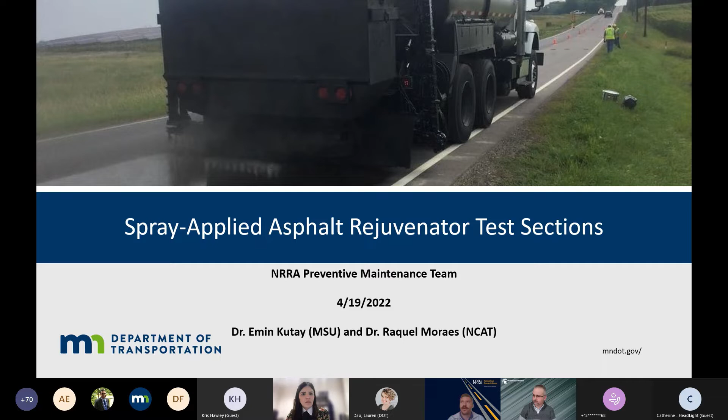This project, the idea really started picking up steam in late 2019. The NRRA Flexible team did a similar project with mixed rejuvenators, where we took a common roadway and were able to insert different products into an existing MnDOT project and then monitor the performance of those projects over time. So back in 2019, we really started moving on this idea, and we had partnered with the city of St. Michael to apply these treatments on a common road, and then MnDOT and MnRoad would monitor those.

As we all remember, things planned for 2020 got delayed, postponed. COVID hit in 2020, we delayed until 2021. During that time, the Minnesota Local Road Research Board found out about this NRRA project and said, hey, we're interested. And they actually funded an additional research effort, which is why we have two presenters and two researchers today.

Once there was the additional research effort, we realized that there was a lot of attention and a lot of demands placed on these sections in St. Michael, and we weren't going to be able to take the amount of cores that we needed to do the characterization over time that we wanted to do. So we added sections at MnRoad.

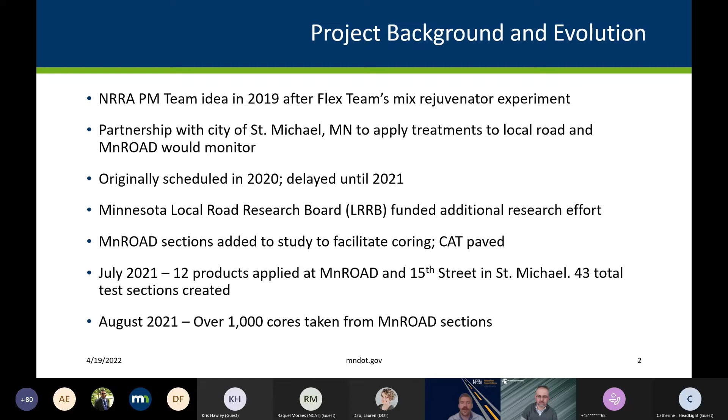So the LRRB portion of the study—the LRRB is the Minnesota Local Road Research Board, which is a unique entity here in Minnesota made up of cities and counties, focusing on all types of road research. Pavements are just a small piece of that, but a very critical piece of their research efforts, and a very big supporter of MnRoad and our low volume road.

So the Local Road Research Board funded the Michigan State portion of the project, which is Dr. Emin Kutay, and they're really focused on the field performance—the immediate impact related to friction and reflectivity—and then creating implementation type tools geared towards city and county engineers who are tasked with managing pavements as well as all their other responsibilities.

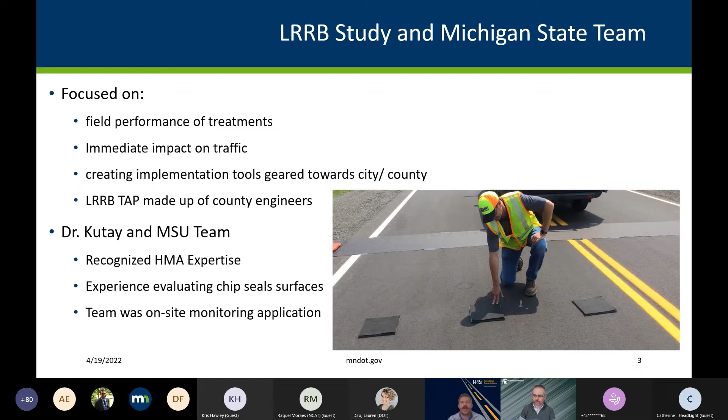So really what to expect when you apply these products, and then how long are they going to last. Dr. Kutay has recognized HMA experience from his time at Federal Highway Turner Fairbanks, but particularly relevant to this project is his experience evaluating chip seals and chip seal surfaces, and they were here on site during the product applications.

So then the NRRA study and the NCAT team is really focused on the binder properties and the changes from the treatment. So once we spray this treatment, what does it change in the surface binder? And then really how long do those changes last?

The TAP with the NRRA is made up of NRRA agency members as well as product representatives, which really gives us that integral feedback loop of how we can tailor the research to best present the results and make the results usable for all stakeholders in the project.

Raquel, or Dr. Moraes at NCAT, is a recognized expert in asphalt binder chemistry. I really respect Raquel. I think she's one of the few actual trained chemists in our field and not a trained pavement engineer that is trying to dust off their chemistry. So really excited to have both of these highly qualified researchers on the project.

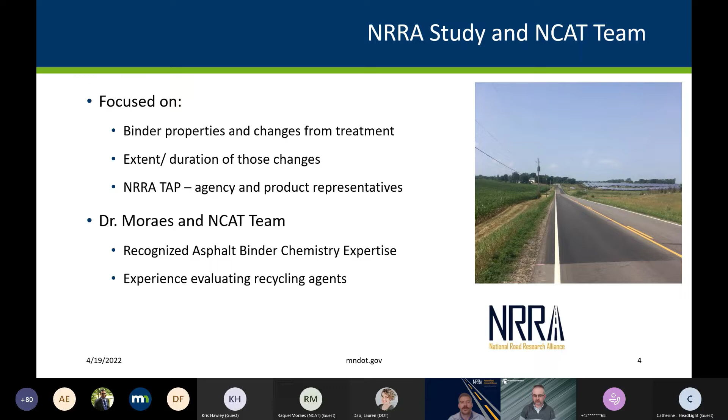I don't think any of these entities, even MnRoad, could have pulled off this type of experiment, or this large of an experiment, without the overall collaboration and environment of the NRRA.

Specifically, I got to mention the product manufacturers and the representatives for those. So we had products in this study from 7 different manufacturers, 12 products total. But having all of these competitors on a common study, we haven't had any of the issues or any of the stuff that you would worry about bringing competitors into a common project and room. We're all really working towards making the research as beneficial as possible for everybody.

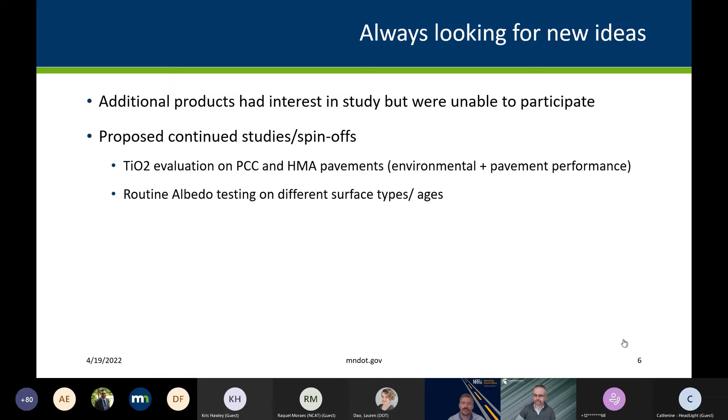Okay. I'm going to go ahead and get started. Can you see my screen and can you hear me? Michael, can you confirm? Yes, we can. Well, thank you so much, Michael, for the nice introduction.

Before I start with the slides, I'd like to acknowledge my co-PIs on this project, Dr. Haider and Dr. Chatti from Michigan State University. Also, our graduate student, Purnachandra Vadi, who's the person who's been doing most of the work in here.

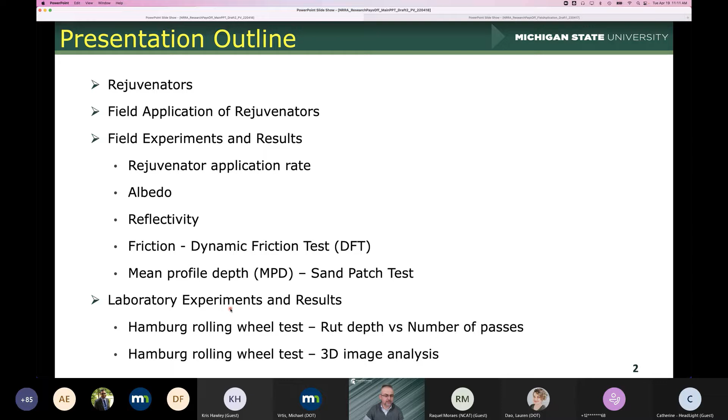So this is a quick outline of my presentation today. I'll be providing some information about the rejuvenators that were applied at MnROAD sections and provide some very quick videos of applications, so that you can have an idea of how they look. I'll present some of the results of the field experiments, application rate measurements, albedo, reflectivity, friction, as well as mean profile depth. And also we started running some experiments on the 1,000 cores that Michael mentioned. We don't have all 1,000 of them, but we have about half. And we have started testing those, and we'll show you some of the results of our testing.

So in terms of introduction, spray-on rejuvenators are used to revert asphalt binder aging. So I'm assuming since you are here, you know about what they are. There are many petroleum-based as well as bio-based products, and they are supposed to prolong the service life of pavements, seal minor cracks at the surface layers, reduce the permeability, and so they have a lot of advantages, and each of these products have different advantages.

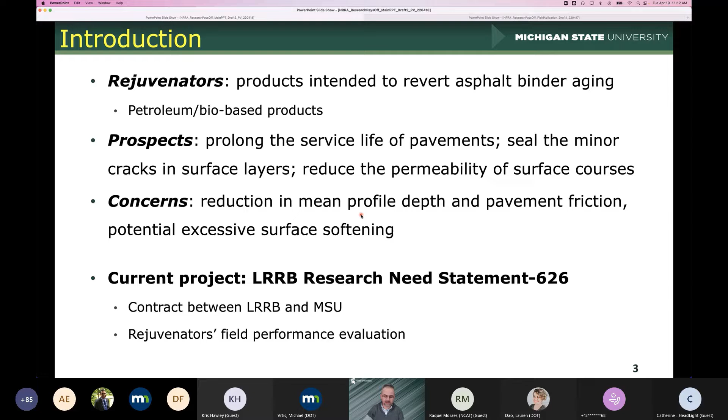There might be some concerns on mean profile depth and friction at the surface, and potential for excessive softening at the surface if the material is causing too much softening. So these could be some issues. So this project is going to be looking into all these and try to find some answers to some of the questions.

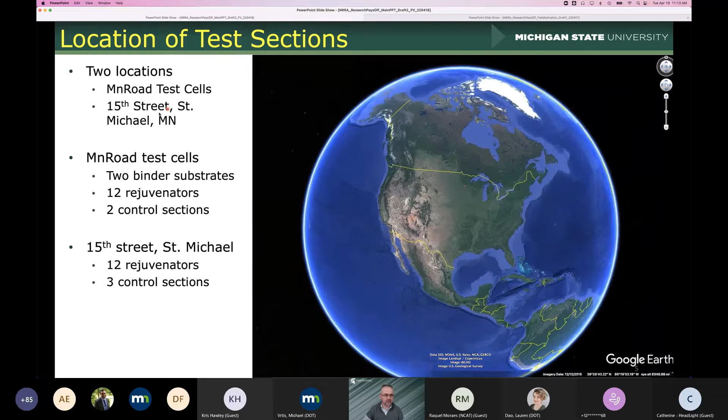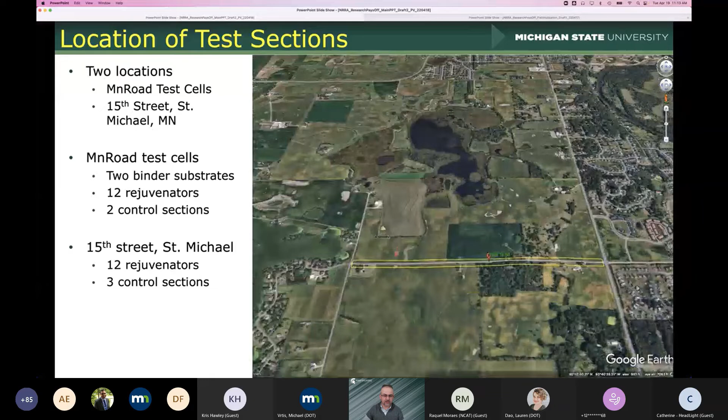They were all applied on 2 weeks back to back in July, except one of them. One of them, ARA1 Ti, was applied about 3 weeks later because of some scheduling issues. So we have 2 locations. One location is the MnROAD test sections at low volume. The other one is at 15th Street, St. Michael. This is the city of St. Michael, and this is where the real-life field test sections are located. The ones in the low volume road section are actually located right here. The ones at 15th Street are not too far from MnROAD, and this is the location.

So if you look at the 15th Street sections as well as the MnROAD test section, this shows the locations of the cells as well as their names. In here we had 3 controls: 1514, 1505, and 1507 are the 3 control sections that were not sprayed with anything, and the remaining locations are all sprayed with different rejuvenators, and I'll show you some videos of those in a minute.

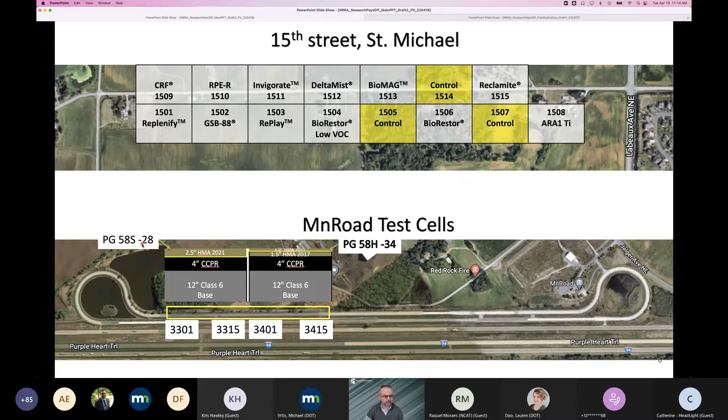At the low volume section and MnROAD, as Michael mentioned, there are 2 substrates. One is an overlay with 58S28 binder, and the other one is a 58H34 binder. The test sections with the -34 are 3401 through 3415. There's a control as well there, and 3301 to 3315 are the cell numbers for the applications at the surface of 58-28 binder.

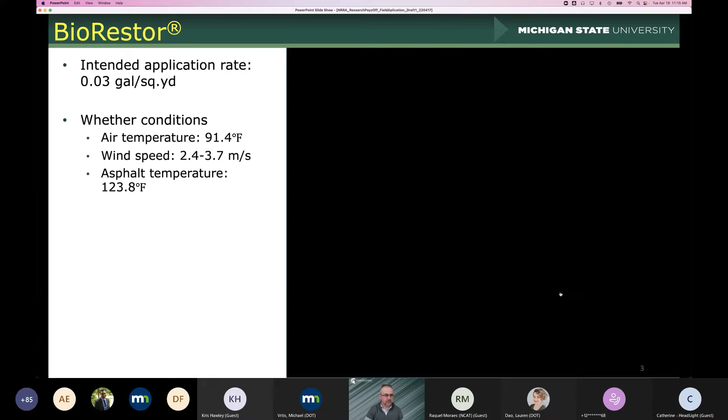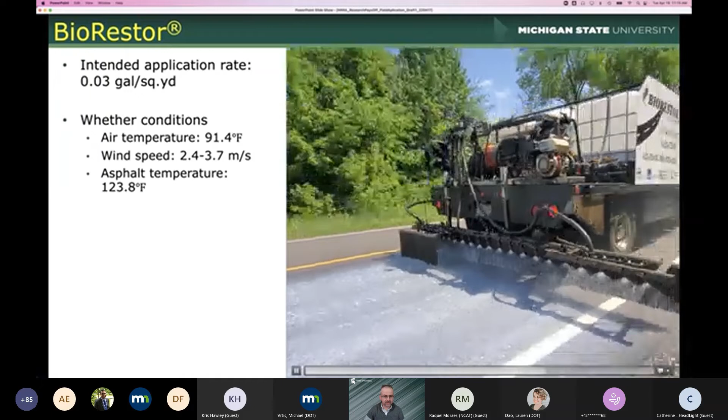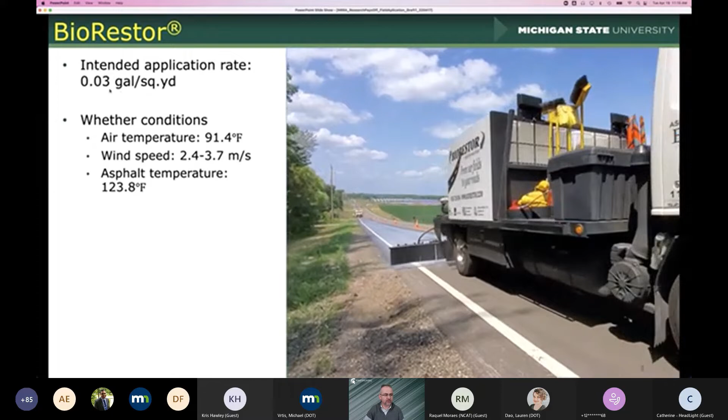So now I'm going to switch to another slide to show you some videos of the applications. So this is one of the applications. As you can see, most of the applications were done on a sunny summer day, essentially. The temperatures were about 91 Fahrenheit. This particular one had a low application rate of about, this is the intended application rate, by the way, 0.03 gallons per square yard. This is what we were given by the manufacturer. This had some kind of milky color, and we had some wind during the construction, but not much.

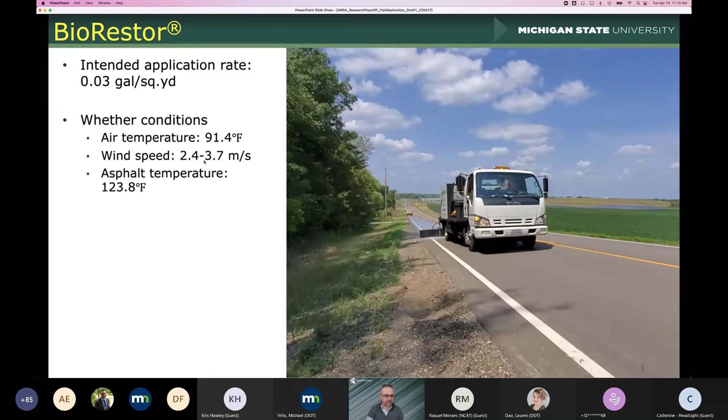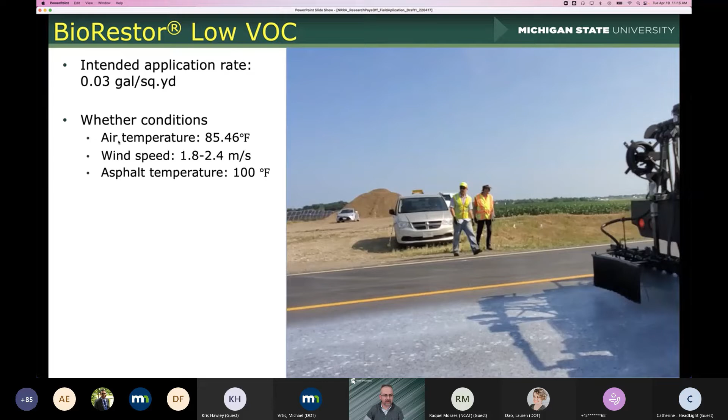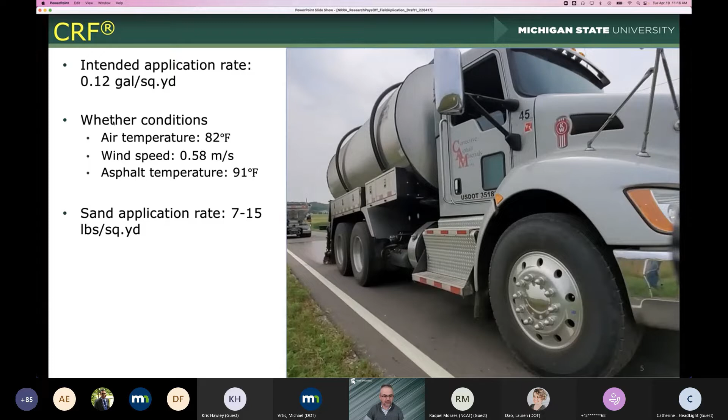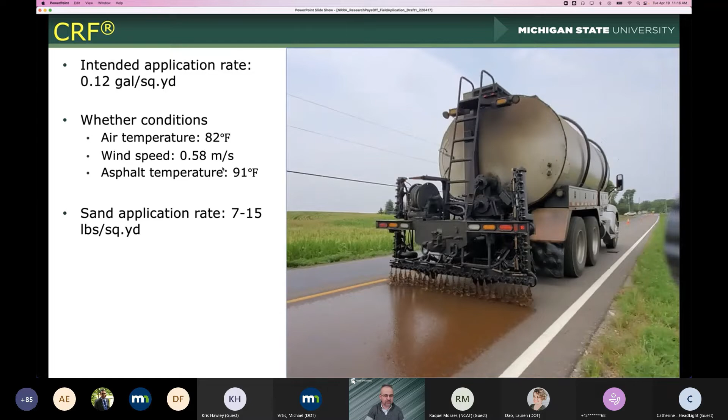I'll go quickly here. This is the second product. Application rate is also relatively low compared to some others. So I'll go through the next one. This one is the CRF. This particular one had the application rate much higher than the other ones. The air temperature, surface temperature and wind speeds were all comparable between different applications. At the end of this CRF application, sand was applied on the surface. So that was one of the practices of this particular application.

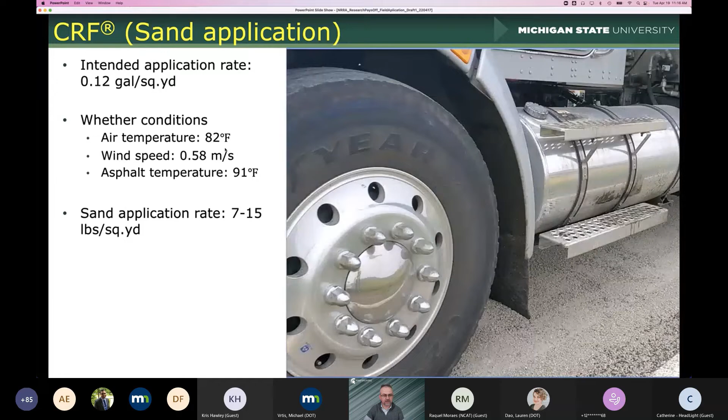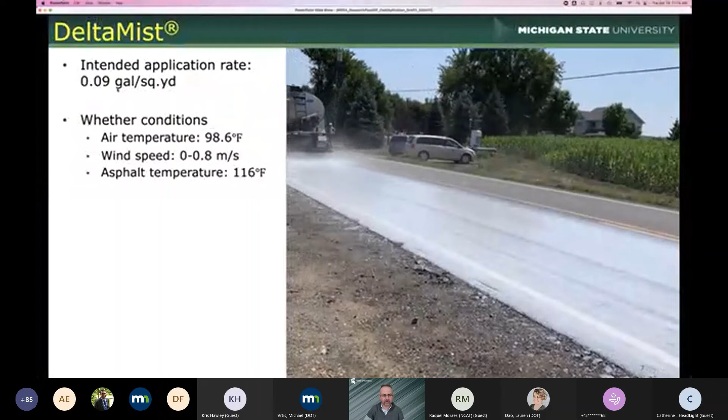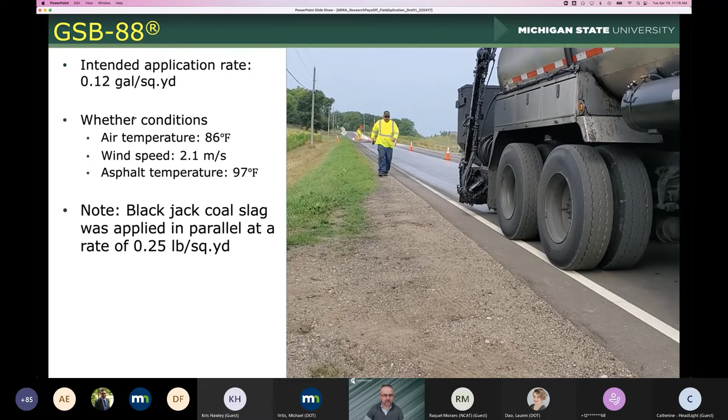This is another product, Delta Mist, which is 0.09 gallons per square yard, and the air temperature was a little bit higher, pavement temperature a little bit higher on this particular day. So I'm going to go really quick to show you all. So this was GSB-88, a little high on the application rate side, and while the material was applied, at the back, black coal slag was applied to provide friction.

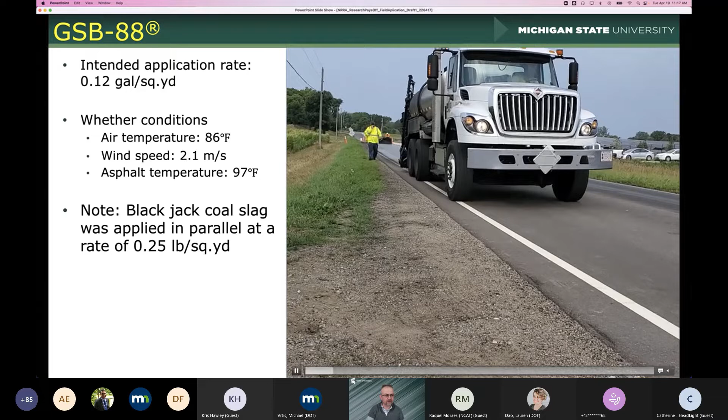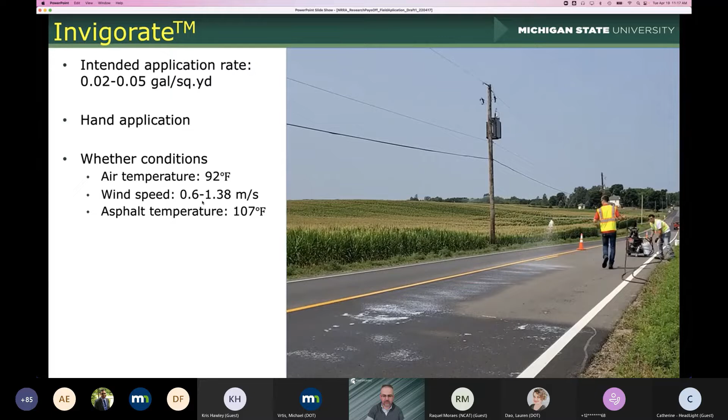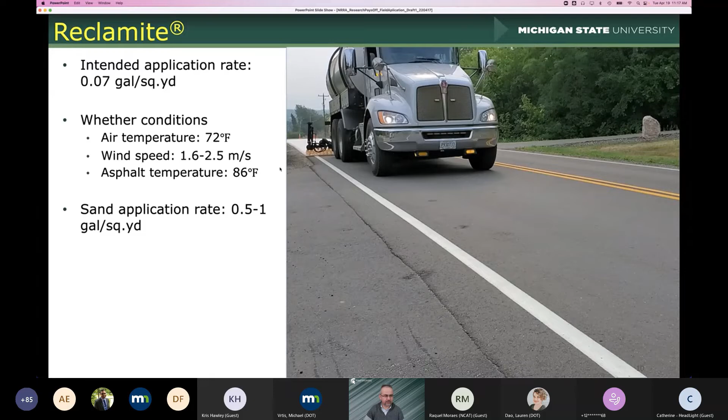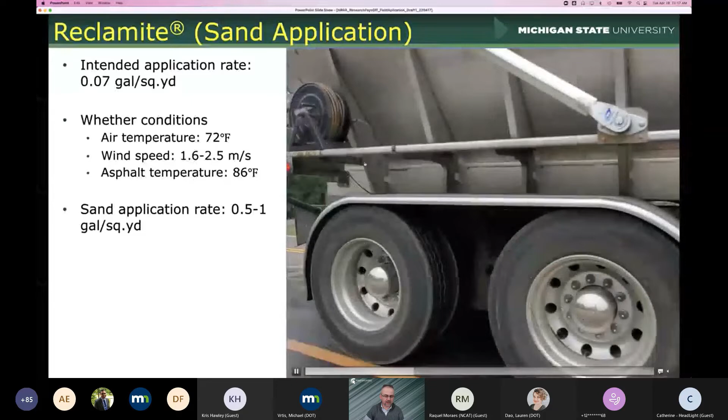So Invigorate, this particular one was applied by hand, and its application rate ranged from 0.02 to 0.05, and the weather conditions were essentially the same. So I'm going to go kind of quick here. So Reclamite, this had some brownish color. This had also similar application, except the application rates were a little bit higher. And at the end, there was a sand application as well. So this shows the sand application at the end of the application of the actual material.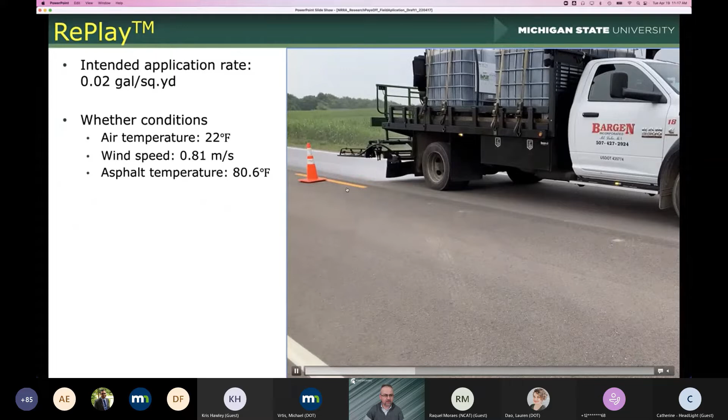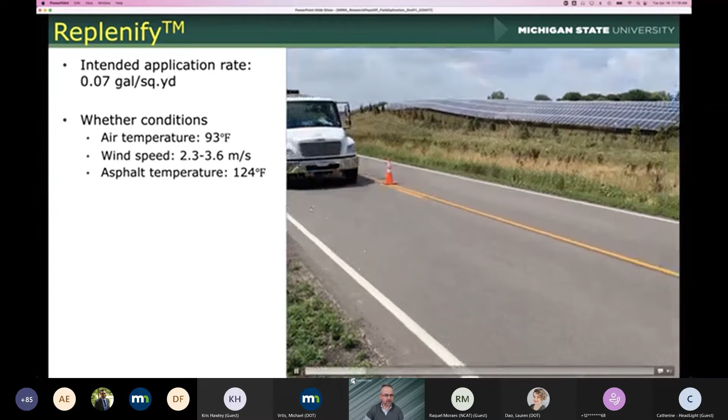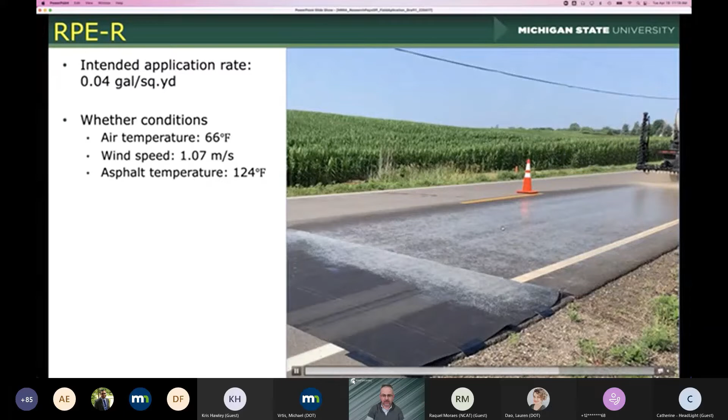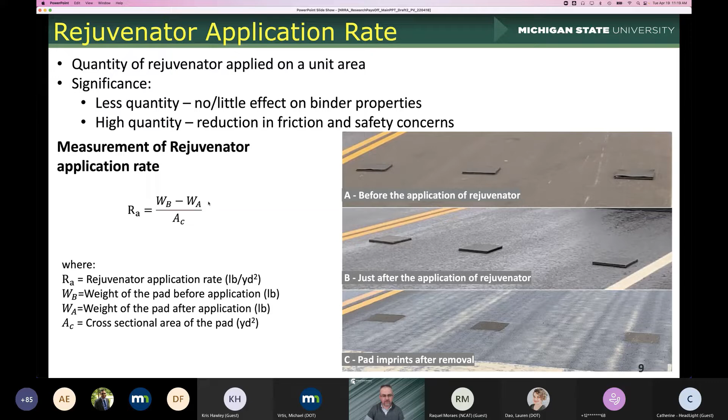So during the application, as you've seen from the videos, we measured the rejuvenator application rate. We meaning actually the team. Michael Vrtis actually measured pretty much all of these. The measurement of the application rate was based on weight, not volume. That's why I will be providing the rates in terms of pounds per square yard. Before the application of the rejuvenator, these pads were placed, and we had the weights before the application and weights after, and the difference divided by the cross-sectional area gave us the application rates.

So this slide is showing the application rates that we measured. The ones on the left show the weight-based application rate at 15th Street and the 2 MnROAD sections. On the right, the application rates that were reported by the manufacturers. This is in gallons per square yard, and this is in pounds per square yard. As you can see, the application rates varied quite a bit depending on the product. Some application rates were quite high, and some were quite low. Typically application rates from one section to another were mostly consistent, except in a few cases where certain application rates were kind of too low. So this needs to be noted in case there are issues in the future.

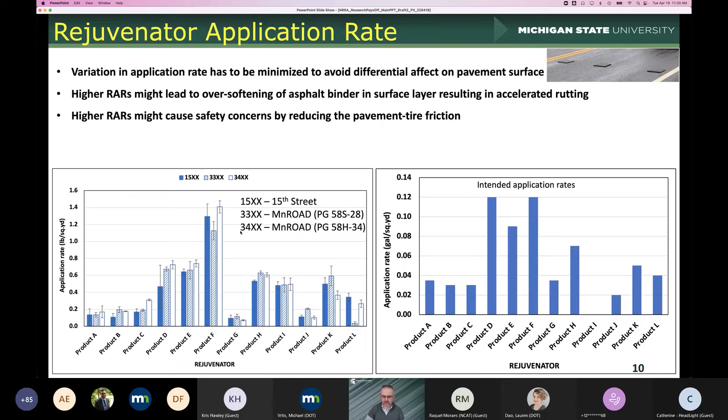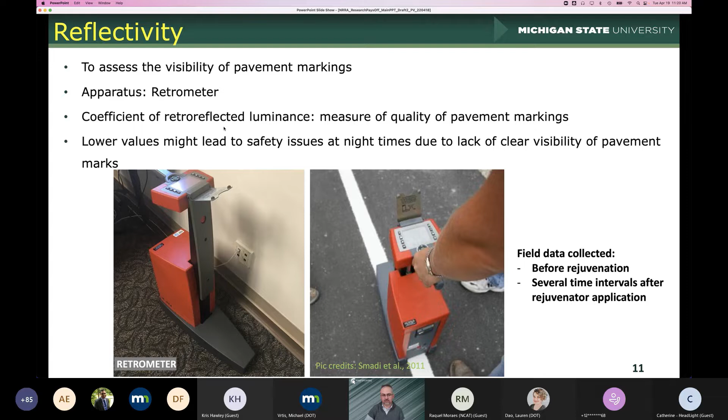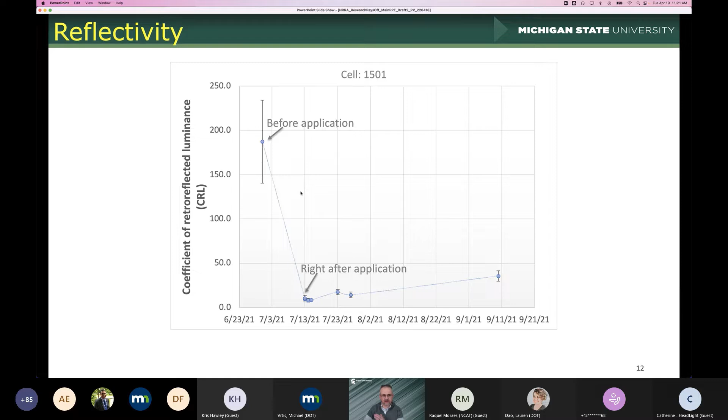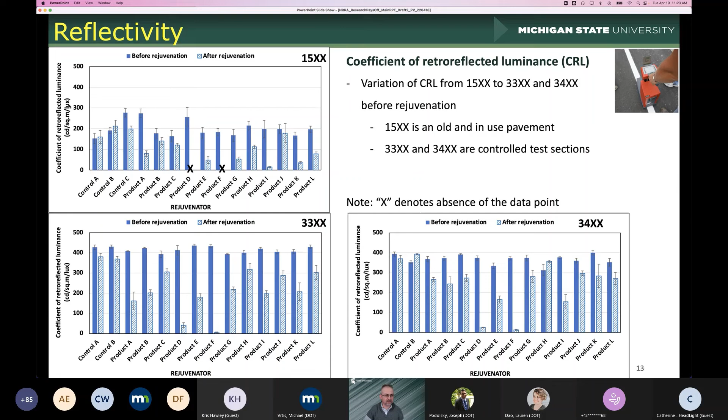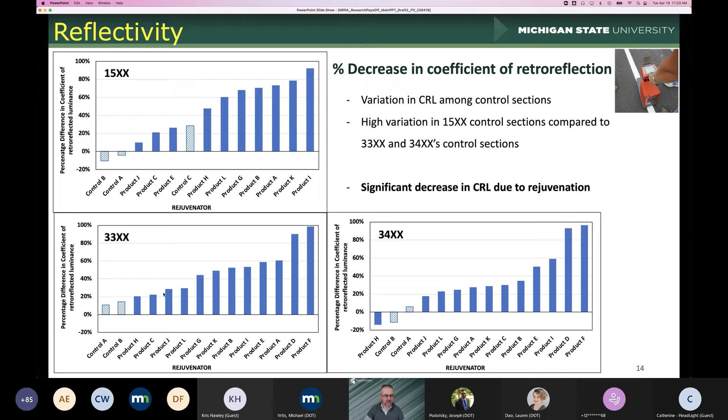This is the same data shown in a different way, just the difference. If you look at the percent difference between before and after, we sorted the data, and I highlighted the controls so you can see where they are. So you can see the difference between the different products. As I mentioned, some products had a significant decrease, as high as almost 95%, some somewhere in between, and some didn't affect the reflectivity much.

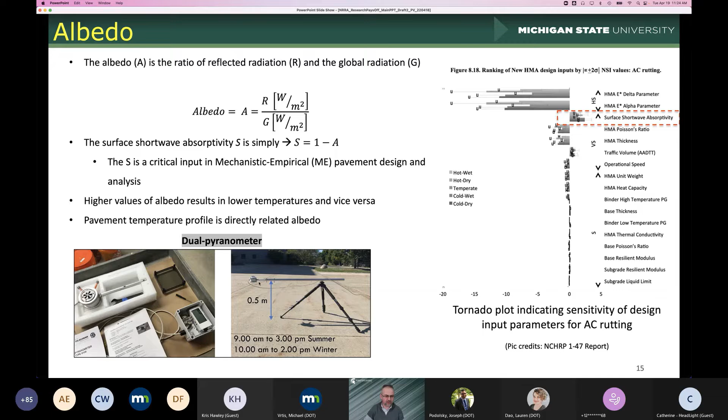We wanted to see if these products affect the absorptivity or albedo. I'm going to use the term albedo as just 1 minus SA. Albedo is essentially reflected radiation divided by the global radiation. We measure it using this dual pyranometer device. These are some of the results of albedo, and as you can see, albedo didn't change too much from one product to another in certain cases.

In certain cases, there was significant change. In certain cases, there were increases, which you wouldn't expect, to be brighter. A higher albedo means brighter color, meaning more reflectance. So in some products we had more reflectance compared to the control, and that's because of the sand. When the sand is applied on top of the product, that affected the albedo.

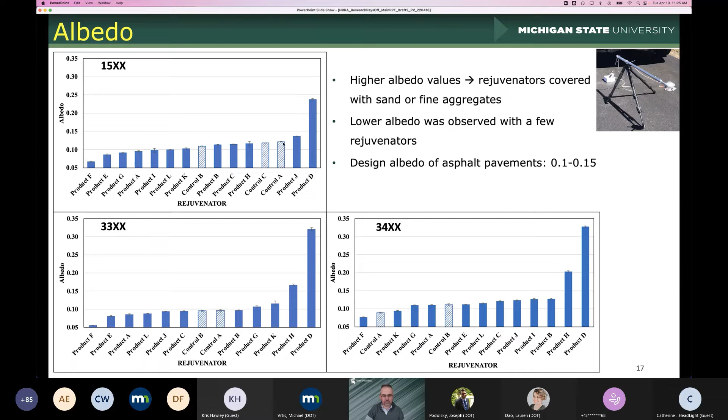One thing I want you to remember is that lower albedo means less reflectance. That means the temperature of the pavement will be higher, so there will be more heat absorbance when you have low albedo values. These products will be absorbing more heat compared to these products. If you were to classify them, a few of them were low values, a few of them high, and the rest are pretty much the same.

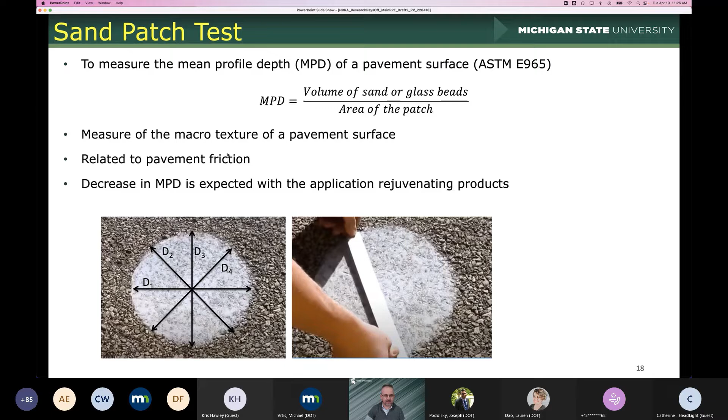The next set of tests I want to show is the sand patch test, essentially mean profile depth using the sand patch. What you're seeing here is all the different sand patch results. The bottom line is that the mean profile depth values for most products were pretty much the same, and very low in magnitude, except in a few. Again, that's because of the application of sand or fine aggregate at the end. You would see some increase in mean profile depth there; other than those, all the rest are small values of mean profile depth.

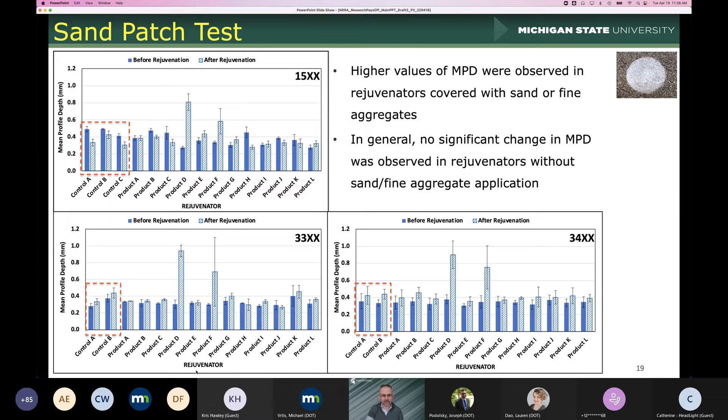So the next set of tests that I want to show is the dynamic friction tester, DFT, results.

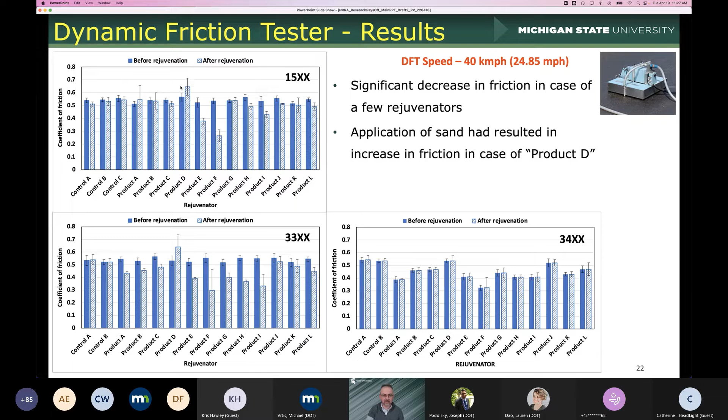Friction tests were measured at different speeds: 20, 40, and 60 kilometers per hour. These three plots show the three different speeds, and I'm going back and forth just to show the friction values before and after application, similar to the sand patch results. Some applications showed not much difference, while some did have an effect, reducing friction, like products E and F in this particular case. In some applications, there was an increase in friction, as I mentioned, because of the applied sand as well.

Lastly, I'd like to present some partial results of the laboratory experiments we have been running. These laboratory experiments included several types of tests on the cores that we have. We've started these tests but haven't finished yet - this is the test we just started essentially. I'm going to provide only the tests we are running on the Hamburg wheel tracking device. We will be running all these experiments, and for the sake of time, I will not go through all of them.

The idea of the Hamburg wheel tracking test, the reason why we are running it, is that if there is excessive softening at the surface because of the application of this rejuvenator, first there will be rutting compared to the control, and also we are expecting heaving at the surface. Another potential thing that can happen, which we kind of saw, is that if there's excessive softening and the moisture isn't compatible with that product, the aggregates would be raveling, and that would be a problem. We actually saw some of that. I won't show all the results here - only some of them.

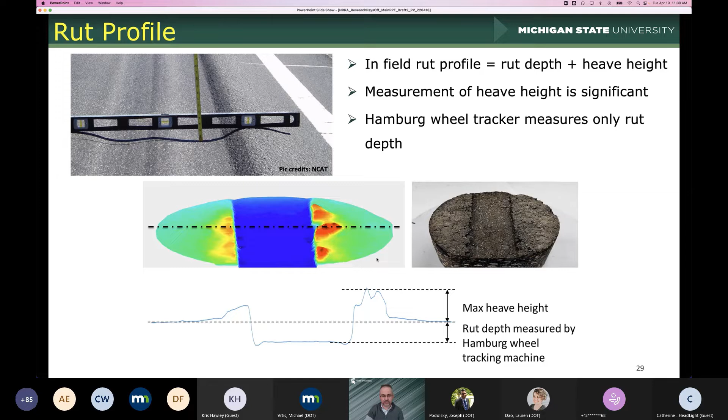But rutting, as measured by the device, is actually the deformation in the vertical direction relative to the initial condition. The device cannot measure the heaving that happens on the sides. We saw significant heaving visually when looking at the tested specimens - there was a lot of heaving on the sides.

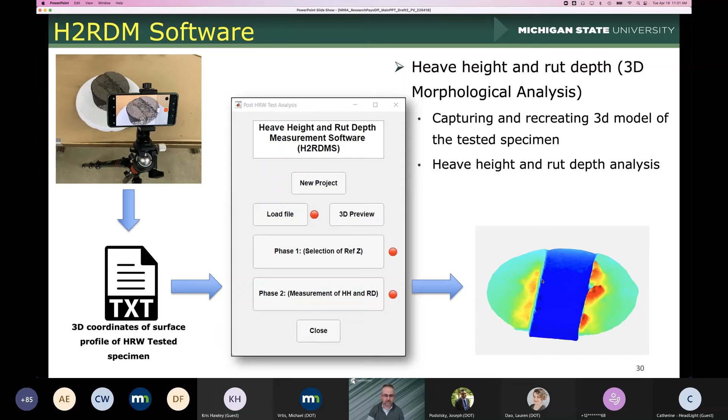So we actually used this method to measure the three-dimensional surface texture. We've been using this in chip seals and many other applications. This method and this particular software was written by Chandra, a graduate student working on this project. We essentially take a picture from many different views and analyze them using 3D stereo software to come up with a 3D point cloud on the surface, and we measure the maximum heave height and the rut depth from the images.

I guess that's all of what I'd like to present today, and I'll be happy to answer any questions you might have.

Hi, this is Max Barry with the Illinois Tollway. What are your plans for continued lab testing of these sections?

So one of the tests we're going to run is the Hamburg fixed wheel test that we developed here at MSU, where we replace the steel tire of the Hamburg with a rubber tire, lock it, and run a sliding tire test on the surface. This is a test to see how much surface is lost because of abrasion.

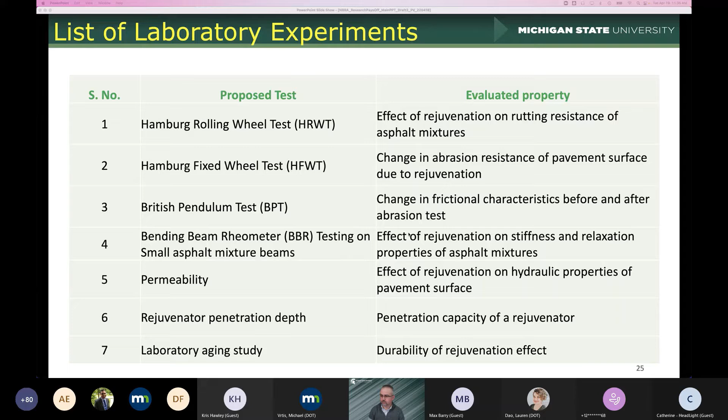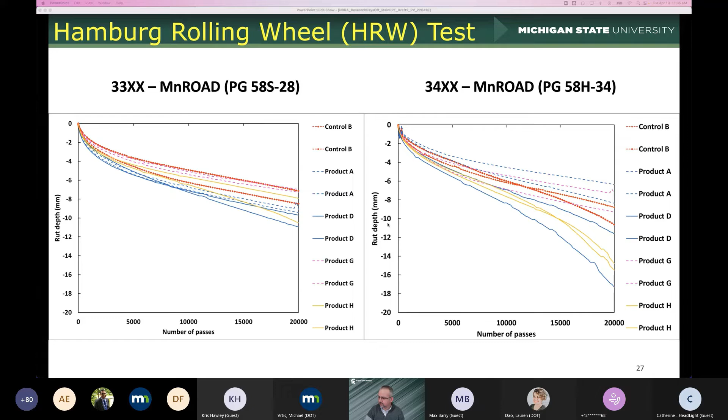Let's see, how did the rutting graphs compare to the control? This is probably the best one to show. Again, we haven't tested all of them, but this is the total rutting of the control—3,300 sections and 3,400 sections here. Let's focus on 3,400 for now.

So this is the variability, control versus product A. We haven't done the statistical analysis yet, but visually, by looking at the error bars, it looks like A, G, and B probably won't be statistically different, but D and H might be statistically different than B. Again, we need to do the statistical analysis to confirm that. We haven't finished the testing yet—we're right in the middle of the project and running these tests right now.

I don't see any other—okay, I see one more. With so many products involved in the study, do you plan on making a holistic evaluation of each product individually, or do you plan to identify which products excel in each test area?

Michael, you can chime in perhaps here, but currently the plan is, right now we are presenting it the way I presented—without naming the products and comparing them individually to the control. That is the current plan at the moment. Michael, do you want to chime in here a little bit?

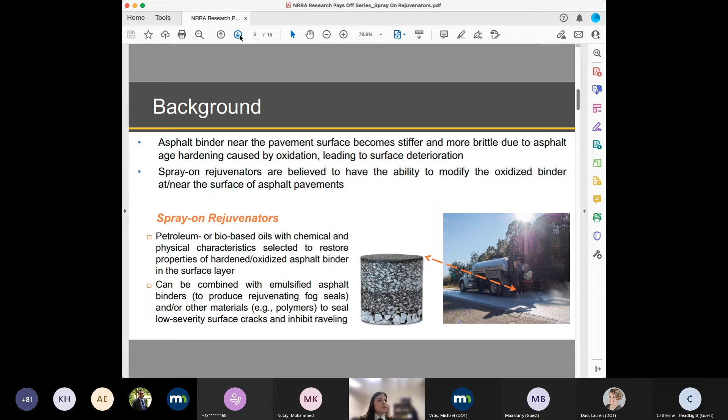The overall motivation for this study involves several points to be observed. We know that the effectiveness of these products is usually maximized when applied to a pavement surface that is still young or in good condition. However, we do not yet know for how long this effectiveness persists after application. Currently, we have only one procedure or standard method used for evaluating these products after they are applied in the pavement, and this standard comes from the Federal Aviation Administration procedure, the P632.

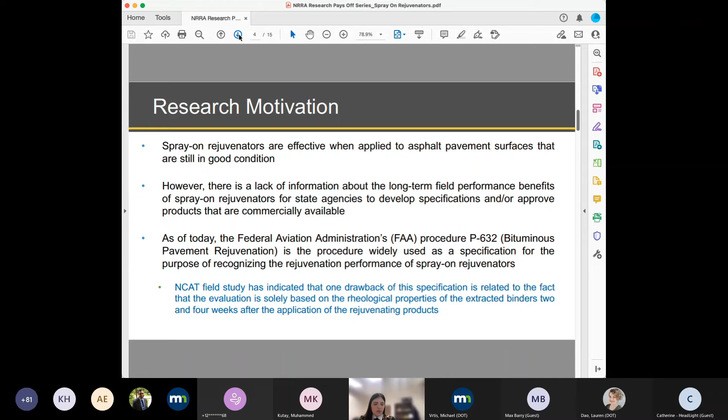That is the common procedure used for evaluation of these products on surface pavements. Our NCAT field experience has shown that even though this standard procedure can be useful, there is a lack of information because the target window for evaluation, following this standard, consists of between 2 and 4 weeks after treatment application. As you can see on this slide, our study has shown that this limited window of only 4 weeks is not enough to really differentiate among several products in terms of how each one is able to last or modify the binder present on the surface of the pavement.

What our study has shown is illustrated in this graph on the left side of the slide. We've observed that overall, the products have 2 stages of behaving on the surface of the pavement. One stage we call early rejuvenation, where immediately after the products are applied we see a decrease in binder stiffness, because these products start to soften the binder available on the surface. The second stage is what we call late rejuvenation, where the binder stiffness starts to increase as the pavement progresses in aging. This decrease in softening of the binder is product-based, and the overall difference among the different additives can only be captured after a long-term evaluation.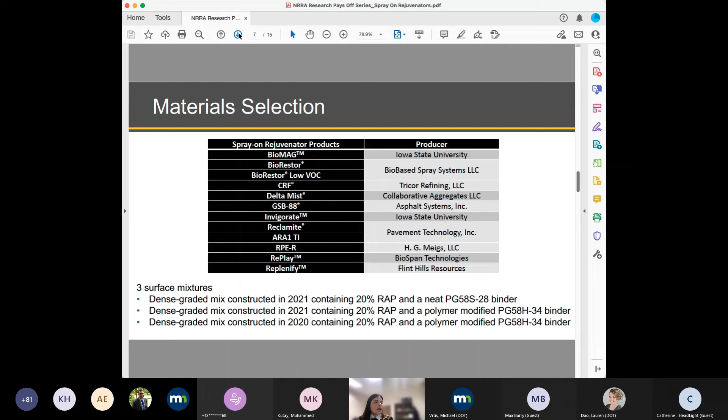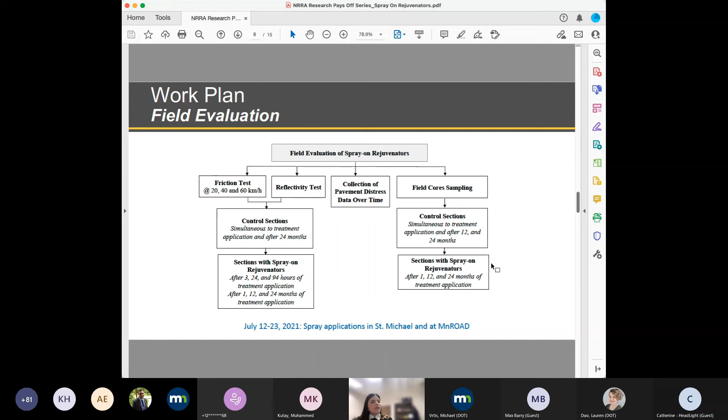The overall work plan evaluation consists of field measurements and also evaluation of binder properties in terms of chemistry and rheology after the products are applied. We'll be evaluating friction and reflectivity for the control and treated sections at different field intervals after the products are applied. We'll also be collecting cores from the control and treated sections for evaluation in the lab after extraction and recovery.

One of the drawbacks when working with binders obtained from field cores is that we have to go through an extraction and recovery process, which involves solvents used to recover the binder. Depending on the type of modification on the pavement surface, meaning the type of additive used with the base binder, there can be an interaction between the solvent and the additives. Many researchers have evaluated this and shown that in some circumstances, the extraction recovery process can alter the properties of the obtained binder.

To avoid any producers of the spray-on products thinking their results could be biased because of the solvent used for extraction, we contacted each of them to indicate which type of solvent they preferred. The majority of producers agreed with using trichloroethylene, the common solvent used for extraction of binders from field cores, and only two of them specifically requested different solvents. This is just for information on which solvents will be used for extraction of the binders from the field cores.

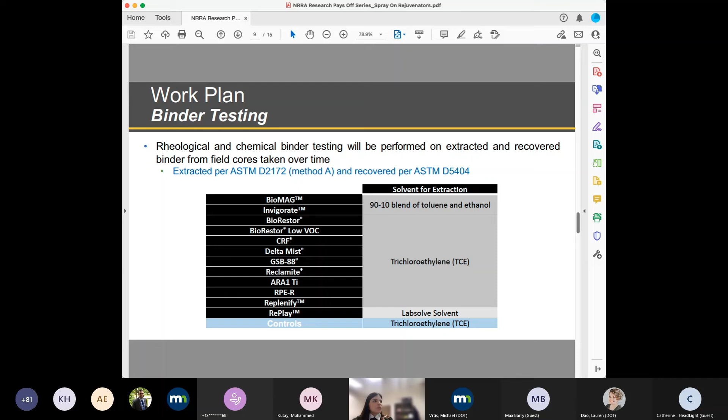After we extract the binder, we will be evaluating the material properties, considering the rheology and the chemistry. For the rheology part, we will evaluate control sections, meaning sections without any products applied, which serve as our baseline, and we will also evaluate the treated sections. The overall properties we will observe include measuring viscosity, Superpave performance grade and MSCR, low temperature properties using BBR, and DSR for frequency sweep construction.

What I'd like to highlight here, shown in orange, is that we will still be using the parameters required by the previous standard I mentioned, the FAA procedure, just to monitor based on the specification currently in use.

I forgot to mention that the pavement surface will be evaluated after the products are applied and exposed to field age intervals of 1 month, 12 months, and 24 months after application. This will let us see how these treatments progress in restoring binder properties, or when they start to lack effectiveness.

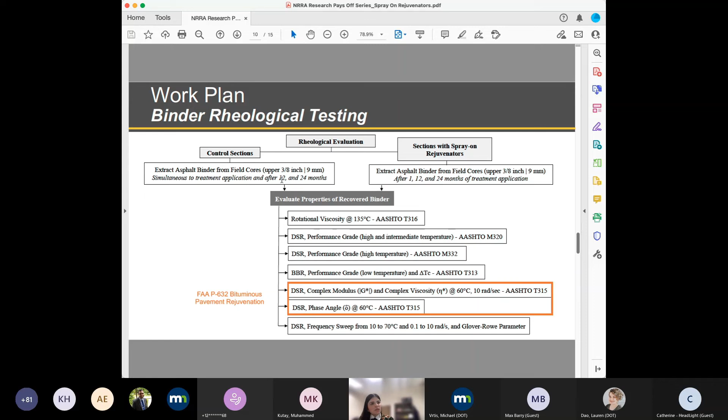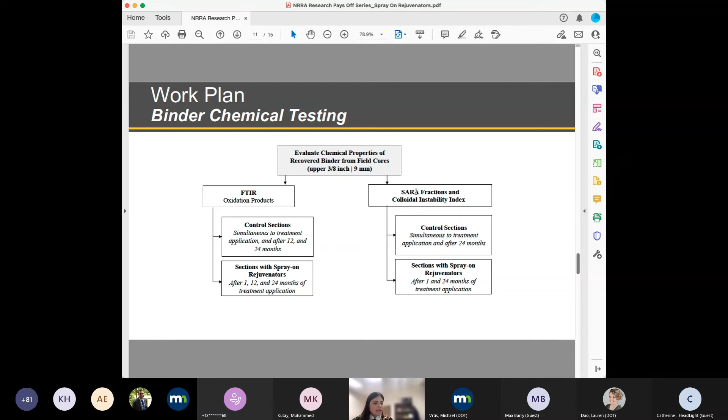From the chemical point of view, the same binder that was extracted and recovered will be evaluated using FTIR, Fourier transform infrared, where we can evaluate oxidation products in terms of carbonyl and sulfoxides, monitoring the control and treated sections after the same field intervals used for the rheological evaluation. Additionally, we will evaluate the SARA fraction, the saturated asphaltenes, resins, and aromatics, to see how each product is really interacting with each of the fractions from the base binders.

Hopefully, the overall findings of this study will help us understand what these products really change in our asphalt surface, try to capture how long that change can really last, and which properties we should evaluate to truly see the benefits of these treatments.

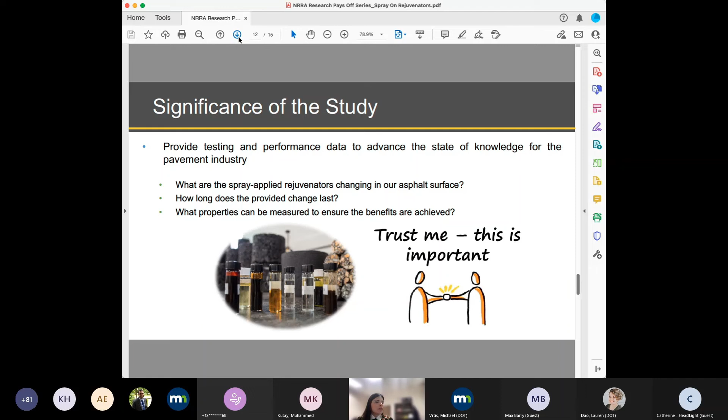Here we have the schedule of the project. As Dr. Kutay presented data regarding the products after being applied, the NCAT step of the study is going to initiate now. We have cores that were collected after 1 month of application, and we are waiting for them to arrive at NCAT so we can start the binder extraction and begin evaluating the rheology and chemistry. Hopefully this coming month we will be receiving the cores so we can start to generate some data.

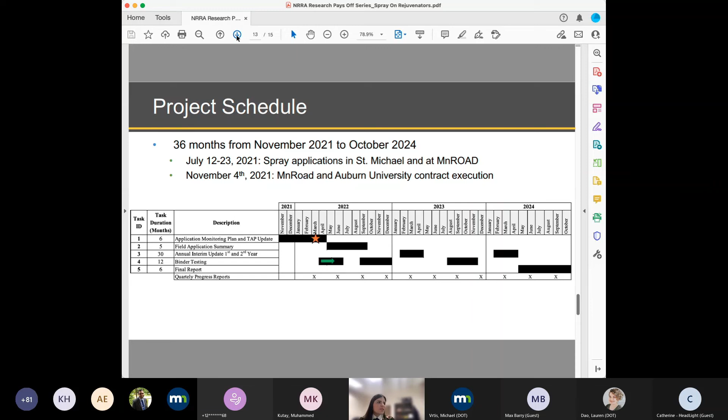And with that is what I have to present today. If you have any questions, please let me know.